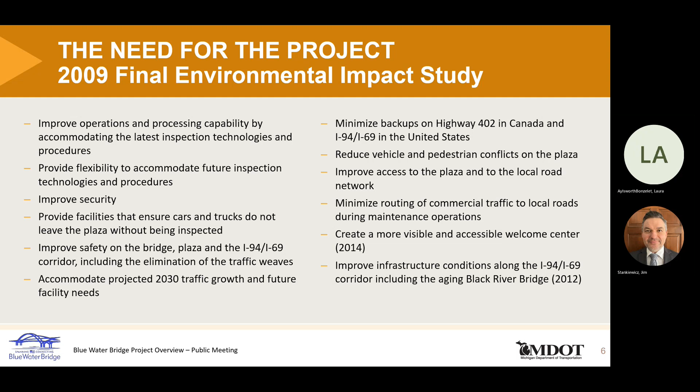This is the final phase of a very large project where construction began in 2012 with the replacement of the Black River Bridge, associated reconstruction of I-94 and I-69, and the construction of the Pine Grove Connector. The construction of the Pine Grove Connector eliminated the previous need for local vehicular access coming from the freeway with a destination to downtown Port Huron, which required multiple right turns along Hancock Street and often caused backups onto the freeway ramp.

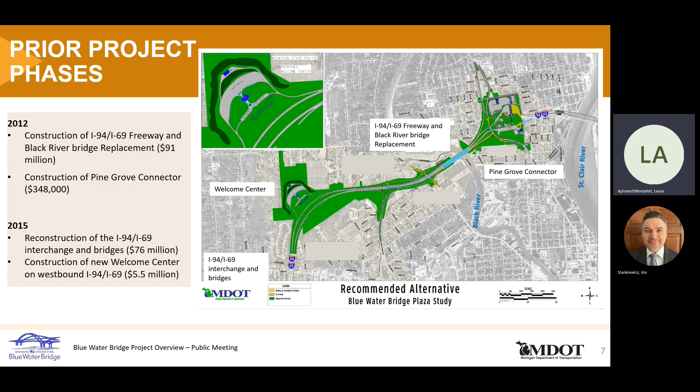Then in 2015, the I-94/I-69 interchange and bridges were reconstructed, and the new Port Huron Welcome Center was built on westbound I-94/I-69. The cost of construction of all those phases was nearly $173 million.

This project has had a long history. In 2007, the draft environmental impact statement was completed with a preferred alternative. Then in 2009, the final environmental impact statement and record of decision were completed with a selected alternative and an engineering report. In 2013, the Blue Water Bridge Master Plan update was initiated by both Blue Water Bridge Canada and the Michigan Department of Transportation, with the idea of optimizing operations between the two countries.

This was presented as the One Bridge Preferred Plaza Layout Summary. No environmental review was conducted, and this alternative was not moved forward. Starting last year, in 2022, the project began a reevaluation of the environmental impacts and a refinement of the 2009 selected alternative.

Now we will describe the differences between the alternatives in more detail. This slide shows the 2007 City West alternative, which was identified as the preferred alternative. Several alternatives were considered, and this layout best met the project purpose and need.

As you can see on the left side of the image, Pine Grove was realigned west of the plaza to address security concerns, which opened a large area for Customs and Border Protection operations. The team also evaluated options to move Pine Grove east and relocate the plaza off-site to where the rest area is located today.

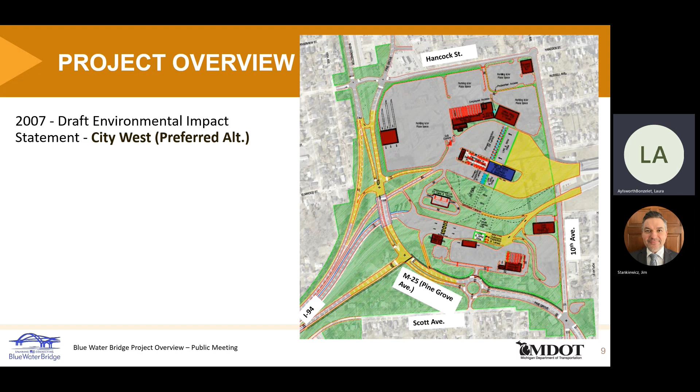Moving to the 2009 selected alternative, this layout was a refinement of the 2007 City West preferred alternative. Based on input received from Customs and Border Protection and the public, this layout was the selected alternative in the record of decision and was approved by the Federal Highway Administration. Due to Customs and Border Protection funding constraints, the plaza component of the project was placed on hold.

However, MDOT moved forward with the I-94 freeway enhancements and Welcome Center, which were completed in 2015. These addressed several green sheet items from the environmental documents, including added lane capacity on I-94, separation of Canada traffic from local movements, upgraded interchanges at Lapeer and Water Street, a non-motorized path across the Black River, and the addition of the Pine Grove connector, which provided a much-needed, more direct route to Port Huron.

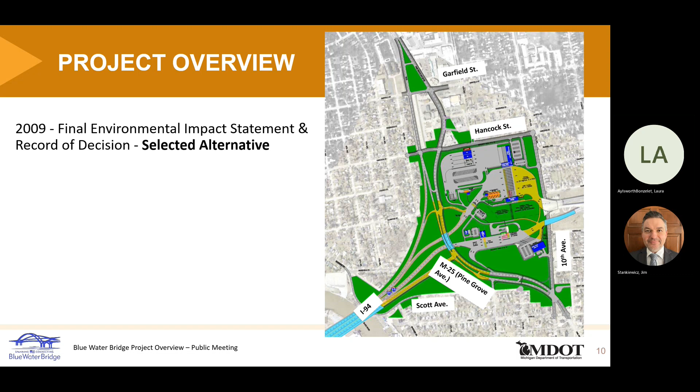This slide details the 2009 refined design over an existing aerial. Pine Grove is not relocated west of the plaza. The design provides for a reduced footprint, which significantly reduces the right-of-way needs north and east of the plaza.

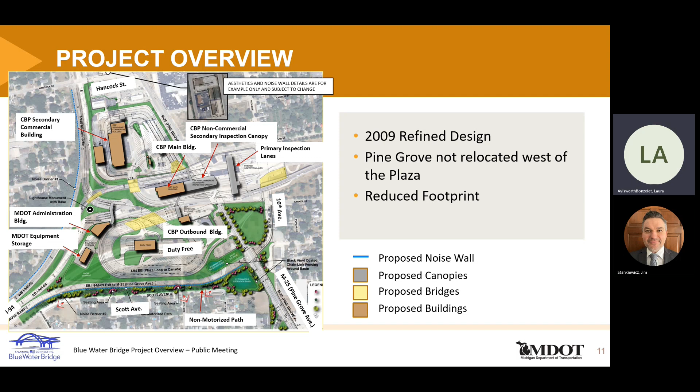This design also improves safety and security, and the layout will permit the plaza expansion to be built in 3 packages or phases. To present more detail on the 2009 refined design is Jim Stankiewicz, who will further describe the current design's project elements and environmental review progress.

The National Environmental Policy Act, also known as NEPA, requires federal agencies to assess environmental impacts of their proposed projects. As stated previously, the plaza was part of the NEPA process that resulted in a Final Environmental Impact Statement, FEIS, and Record of Decision issued in 2009. The 2009 FEIS evaluated the social, environmental, and economic effects of the project.

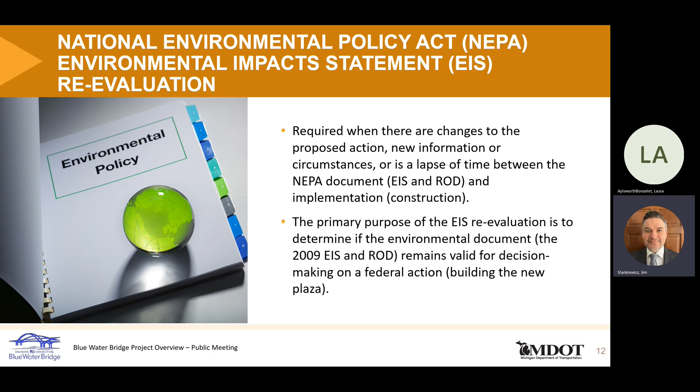Many aspects of the original project have been completed. One remaining portion of the project to be implemented is the actual expansion of the plaza. Under NEPA, a reevaluation is completed to consider changes in the project's design and laws and regulations since 2009, and then to determine whether the FEIS and Record of Decision are still valid or must be supplemented.

Fast forward to today. The purpose and need of the original project to enhance security, improve operations, and safety still very much apply. The Blue Water Bridge has been diligently saving toll revenue and was awarded a $25 million grant for the project, which needs to be obligated in 2023.

This design team has been hard at work reevaluating the 2009 selected alternative based on today's conditions, standards, and security needs. The current layout reduces the overall footprint of the plaza by keeping Pine Grove in its current location, which significantly decreases right-of-way needs north and east of the plaza.

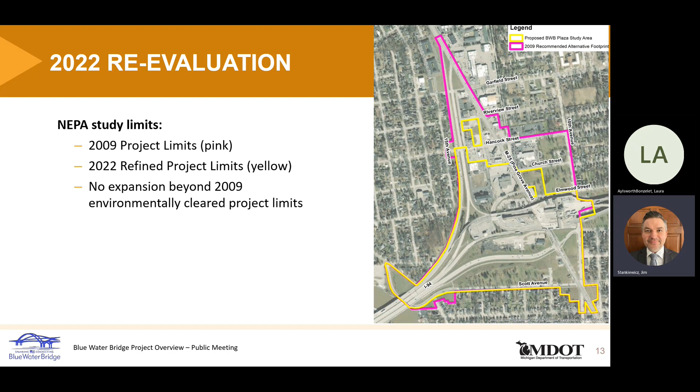The pink boundary line shows the 2009 project limits. The yellow boundary line shows the 2022 refined project limits. There is no expansion beyond the 2009 environmentally cleared project limits.

If we look at what was studied for the 2009 FEIS as depicted by the pink line on the map, the footprint of the plaza was quite large. That project study area was evaluated and considered as part of the NEPA process.

In project lingo, we call it cleared. Based on that clearance, many properties were purchased by MDOT for the proposed project. As stated previously, there have been changes to the requirements for the plaza since 2009. We are currently reviewing a smaller footprint as shown by the yellow line on the map than what was cleared in 2009. This area is the focus of the reevaluation and is about 25% smaller than what was previously cleared.

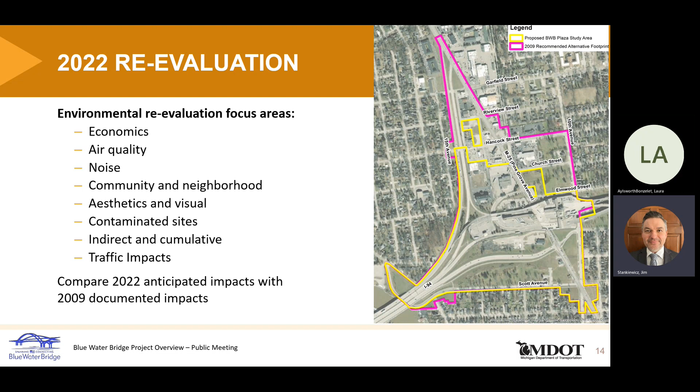We are reevaluating the impacts of the revised plaza compared to what was identified as part of the 2009 FEIS and Record of Decision. While all environmental impacts are considered, a particular focus is on economic impacts due to changes to the project area, air quality because of changes in regulations, noise because of changes in MDOT noise policy since 2009, contaminated sites because conditions could have changed since 2009, and traffic associated with the revised plaza and local roadways because they are different than what was previously analyzed.

We are also reviewing changes within the community and evaluating neighborhood impacts associated with the revised plaza. We are reviewing and revalidating the aesthetic design guidelines developed for the new plaza. As part of the decision-making process, MDOT and the FHWA will review public and stakeholder comments to evaluate community concerns. Ultimately, the FHWA, the lead federal agency for the project, will use the information gathered for the reevaluation to determine whether the 2009 Record of Decision remains valid for the revised plaza.

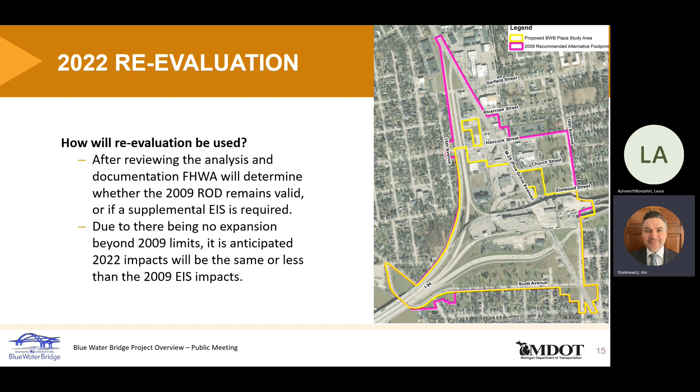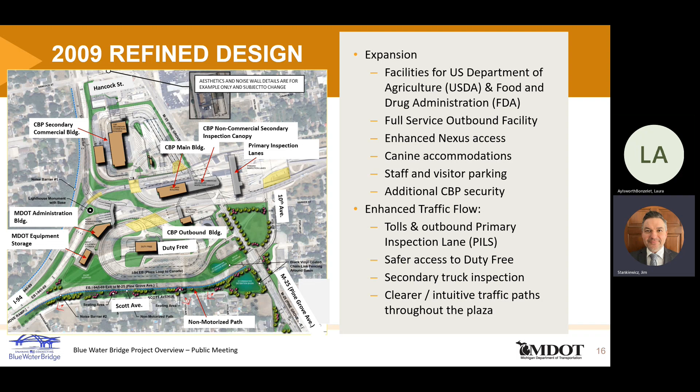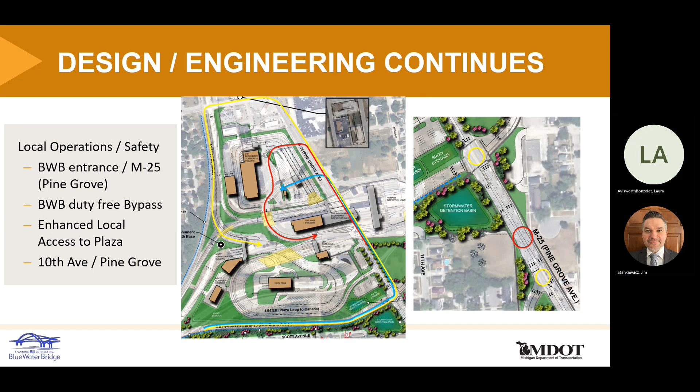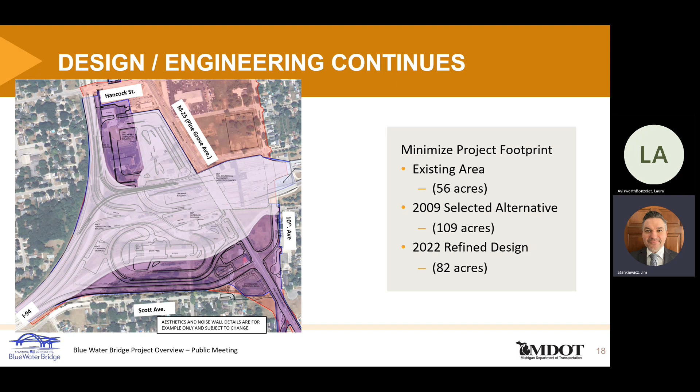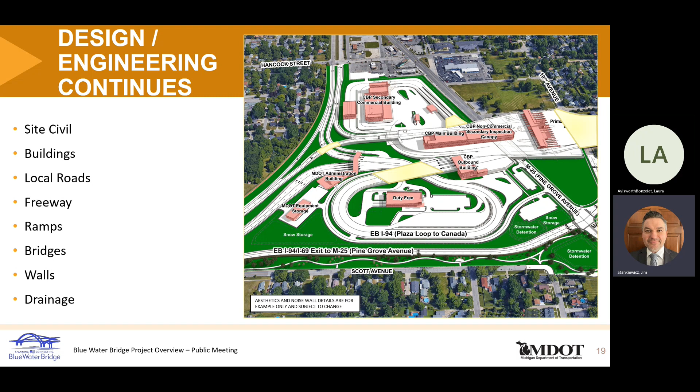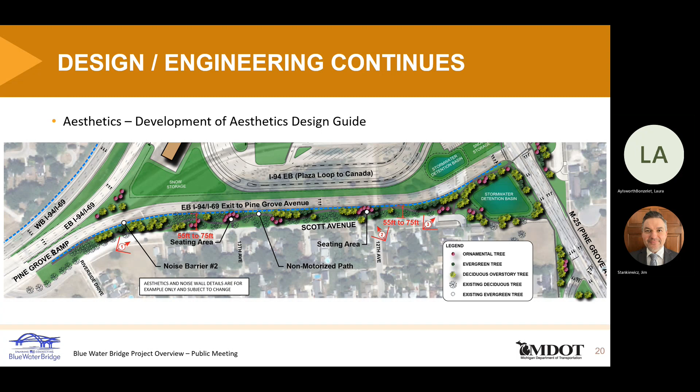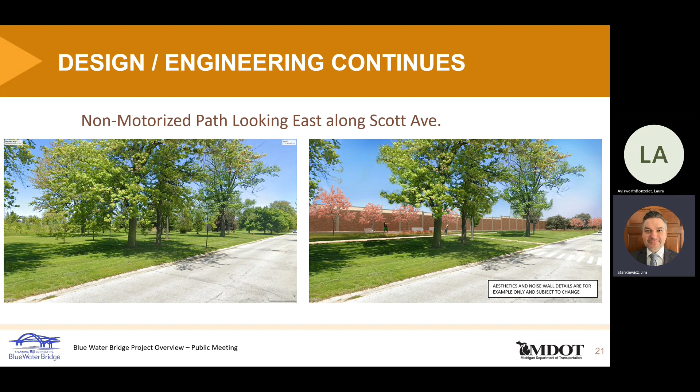Here is a before and after view at Scott Avenue and 11th Avenue, which shows the non-motorized path connecting a local sidewalk. The left image shows the current view and the right image shows the future rendering. In the distance, you can see a drainage detention basin, which will be protected by a fence.

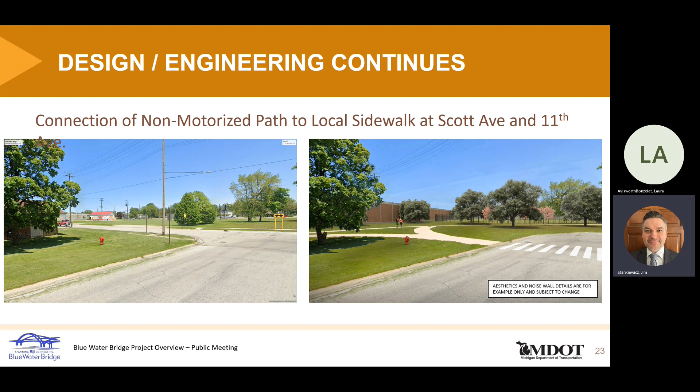This is a before and after view looking east at the proposed plaza from 15th Avenue and Elmwood Street. The left image shows the current view and the right image shows the future rendering. A sound wall is proposed along the west edge of the freeway and the M25 connector between the Black River Bridge and Hancock Street.

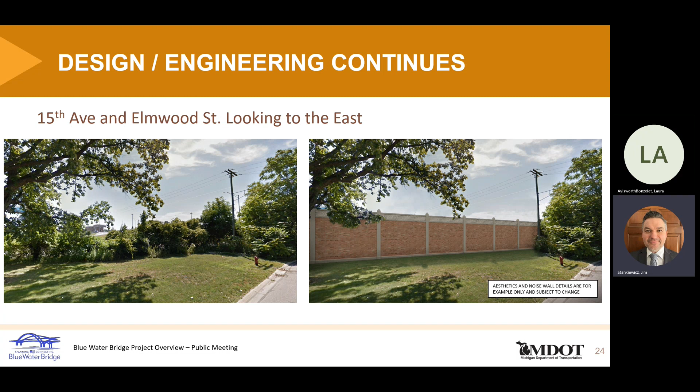Here is a before and after view looking south along Pine Grove toward the plaza. The left image shows the current view and the right image shows the future rendering. Note the new passenger secondary canopy over Pine Grove.

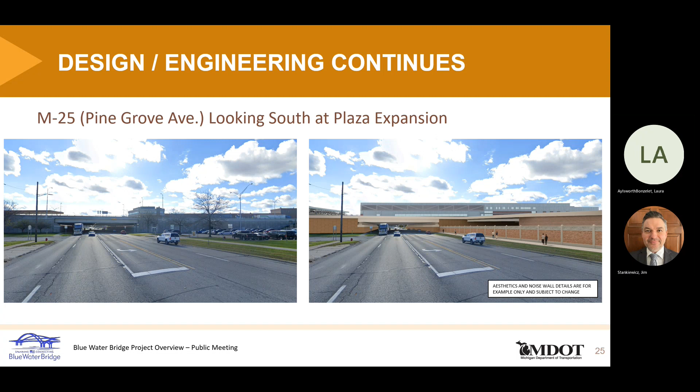Here is what to expect over the next few years as we move towards completion of the final phase of the project. We have recently finalized the Customs and Border Protection feasibility study and expect to complete the environmental review, 30% design, and utility coordination in 2023.

Subsequently, Phase 1 construction will begin on the south side of the proposed plaza. This will include the relocated tolling operation, MDOT administration building and equipment storage, relocated Duty Free America store, Customs and Border Protection outbound inspection, and other associated items.

Phase 2 will complete the north side, which is designated for CBP commercial secondary inspection. The addition of this facility will allow all customs and border protection activities to be consolidated on site. Currently, approximately 1,000 commercial trucks per year are routed to Marysville for inspection through local streets.

Finally, Phase 3 will complete the project by addressing the center area, much of the existing elevated plaza. Existing buildings will be demolished and replaced, providing much needed additional primary inspection lanes for Customs and Border Protection and a safer, more streamlined operation.

A canopy will be added over Pine Grove and the existing tunnel will be rehabilitated, as well as other related work.

This slide visually shows the phases described on the prior slide. The blue color is the 2023 early works. Construction of this early works package will assist in minimizing traffic interruptions and construction impacts to the adjacent properties.

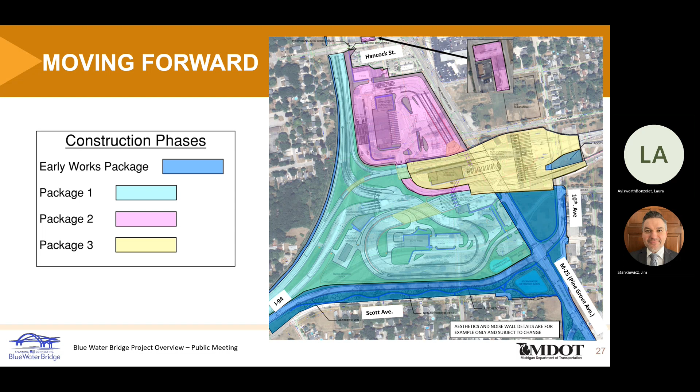The stations are a project introduction and update station, a traffic and safety station, an environmental review process station, a noise study station for further discussion and exhibits regarding the ongoing noise study, an aesthetic station, and a station to hear about the next steps.